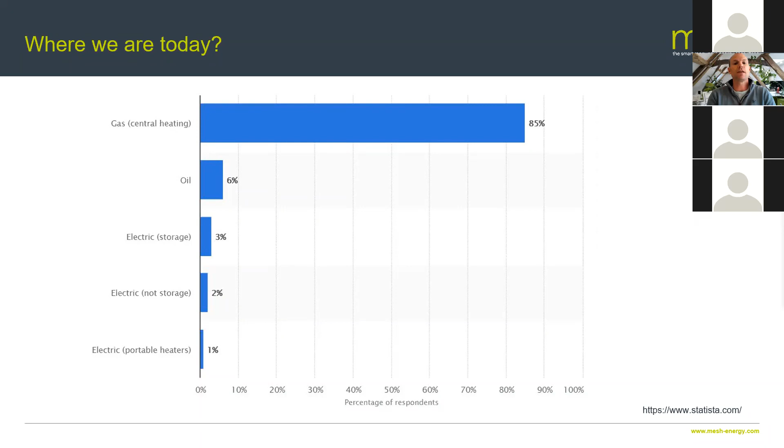So I thought I would just share these numbers if it was at all unclear the magnitude of what has to happen to get off gas. This is when you look at the proportion of houses that use different fuels. Again, gas central heating, 85% there. These other things, electric portable heaters, electric storage heaters, and even oil. Oil, that was a surprise for me, how low that was. But gas by a country mile is the big predominant fuel source. So if we can get off gas to something more sustainable, then that's going to solve a really big problem for us. But the numbers are quite significant.

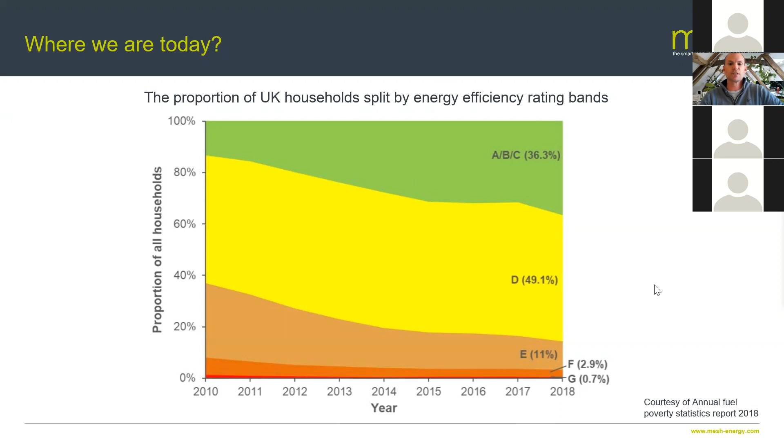And I thought I'd also show you this graphic, for those of you who are familiar with what an EPC is. This is how EPC ratings have been changing over the last 8 years. In the green band at the top, it's EPC ratings from A to C, D in yellow, E in light orange, and F and G in the darker oranges. So as you can see, over the last 8 years, UK households have been improving. They have been getting more efficient. There's still a lot of work to do to get the vast majority in the ABC territory, but the trend is getting there, and I'm sure that will accelerate over the coming decade. It has to, but there is no doubt that there's a big challenge with insulating existing buildings.

So the decade ahead: the government has committed to net zero carbon by 2050. And more recently, only in the news a few weeks ago, they committed to a 78% emissions reduction by 2035. This goes to show that the work being done over the next 15 years really needs to move the needle. If you were to project that for another 15 years to 2050, we'd be well below net zero. But anybody familiar with the Pareto principle, the 80-20 rule, knows there's low-hanging fruit. There's easier stuff to do sooner, and bigger gains in the short term. Then the really hard slog comes in those latter years, as it gets progressively more difficult to get to your goal.

The other big thing which is changing is that all of a sudden, big Goliaths of the commercial world have started announcing their commitments. This has come from a lot of social pressure, but also governmental pressure. So you've got Amazon and Google who've said they're going to be net zero carbon by 2040. And then Microsoft, Apple, and Facebook, who said they're going to have net zero carbon emissions by as soon as 2030. All of these companies use a vast amount of energy, but Amazon and Google particularly, given the size of their businesses and the processes they run to deliver value to their clients, reckon it's going to take them another 10 years. You will have seen adverts on TV from some of these companies. They're pretty serious about it.

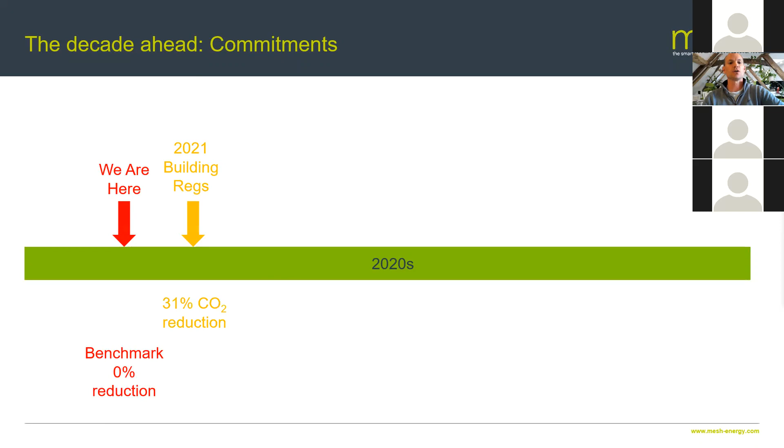So these are the new building regulations, and a 31% CO2 or carbon emissions reduction target is being set through a balance of fabric and emissions. The Future Homes Standard, if you haven't heard of this, the government has done a big consultation on it, really putting a much firmer flag in the ground in the middle of the decade. What we're talking about here is a 70% carbon emissions reduction in the built environment for new buildings by the middle of the decade. And who knows what will happen at the end of the decade.

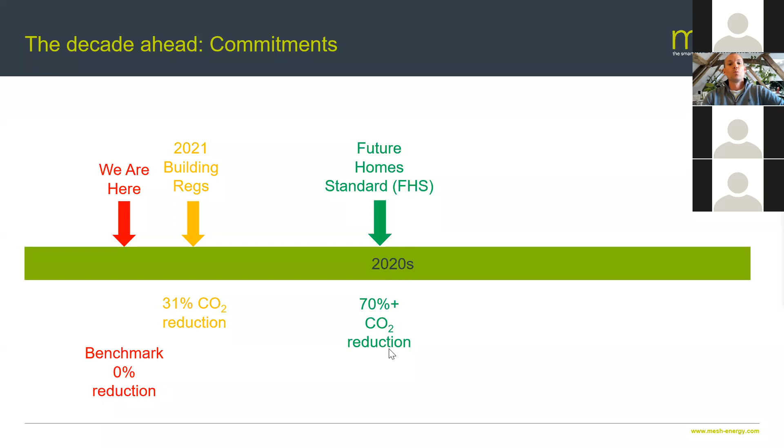So to answer your question in the chat here, what they're saying at the moment is with the new regs coming in, you can still put a gas boiler in and make that work and get that 31% reduction. But when it comes to the middle of the decade, so 2025 at the moment, based on the SAP calculations that are done, gas boilers will no longer be compliant. So we've got 3.5 years to get our heads around putting something other than gas boilers in new build properties.

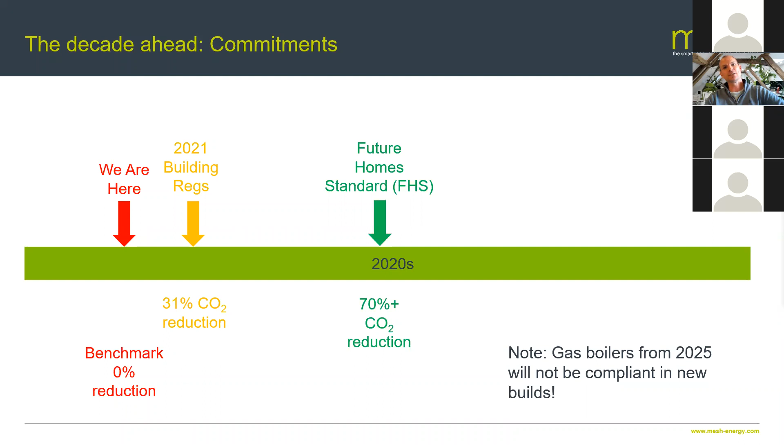So there's your answer. If you guessed 2025, Yulia, well done. Daryl hedged his bets, he said 2025, 26. Anna, we've got loads of people guessing 2025, 26. Glenn, well done. So a really good set of guesses there, but the middle of the decade is when gas boilers will no longer be allowed.

And of course, social media, TV adverts, all kinds of media help do that. But there's a lot of consumer understanding and change that needs to happen as well. But ultimately, they're guided by you guys as design professionals. The actual professional design standards need to change, and there needs to be further training and education around those. And also the rate of change of learning needs to change.

We'll all be aware of the network effect. Imagine you had a line of people whispering to one another what was happening. It would take you a long, long time to get to the end of the chain, and by the end of the chain, the story is likely to have changed. Good old Chinese whispers. But if we can centralize what we're learning and share in a networked effect, the knowledge transfer happens far more quickly, and you find out the key details sooner as well.

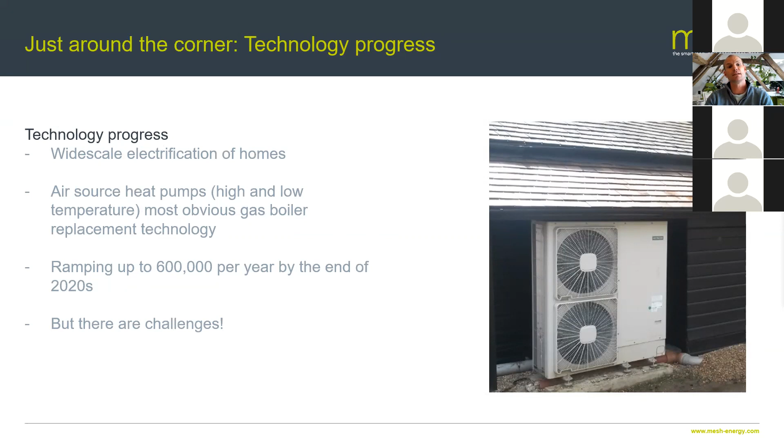But we can't talk about other technologies without talking about hydrogen boilers. Again, hydrogen boilers are being written about more and more. I've answered numerous questions about hydrogen boilers in past webinars that we've done. There is a tendency for some people to think that hydrogen, because oxygen and water are used to produce hydrogen, and once you've burnt it you end up with some lovely, nice stuff at the end as a byproduct, that hydrogen is the solution to all of our problems.

There's two issues with that, and there are various studies. We're not going to go in depth here, but the general headlines are that in hydrogen's favor, using the existing gas pipework distribution network is a big tick. We can use that pipework, we can start introducing hydrogen into the gas mix and almost cutting the two together. And it's not a big leap to get from a gas boiler to a hybrid gas and hydrogen boiler. And there will be some manufacturers that will be doing that to plug the gap.

What numerous studies have suggested, though, is whilst hydrogen seems great on the face of it, and we can use that existing infrastructure, there are issues with storing hydrogen. When you look at the overall cost of providing hydrogen to homes, it's actually relatively carbon intensive, and the energy involved in storing it is massive. The other slight issue is that far smarter people than me reckon that the penetration of hydrogen into the overall heating mix will only be about 15%. We're not expecting a big seismic change over to hydrogen boilers.

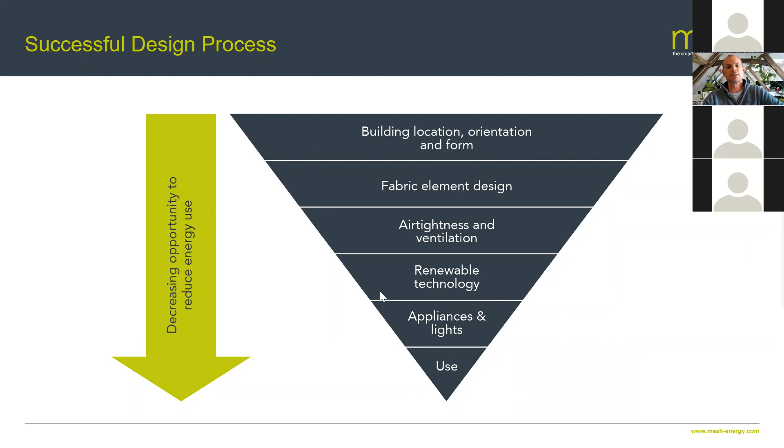As we've said before, the best way to spend money and the best way to save energy is working from the top down here. There's no magic here. This is just logic and being better informed as part of the design process. And so if you can get your head around the common sense involved in these stages of decent design, the next thing is to get your head around how you design.

And this is going from linear design and thinking in a very linear way. The client tells you what to do. You then absorb that. You then tell the structural engineer what needs to happen. The structural engineer then figures out the building can just about stand up or stand up effortlessly. And then you do the MEP and all these other kinds of things. And then the builder does his bit. That is very linear building design. And rapidly, we are getting our head around the fact that that can no longer continue.

And it has to be a very hub and spoke approach. You need to have a solid understanding at the center of your project from a very, very early stage. That could be a great team, a collaborative team, the right tools, or a mixture of all of the above to make sure that you can cover off the design in all of its stages and, as I say, de-risk it. So going from that linear approach to that hub and spoke approach, for some people will be a steeper mountain to climb to effect that change.

Some are already on board with this and get it, and they're working with their clients and the rest of their team to understand costs and the right kind of blend of advice that they get as the project continues. And this is the main thing here, really: with better design comes better goal setting, better sustainable goal setting, and then being able to intelligently push those doors rather than a shotgun approach here, more intelligently pushing doors and using analysis to help you out there.

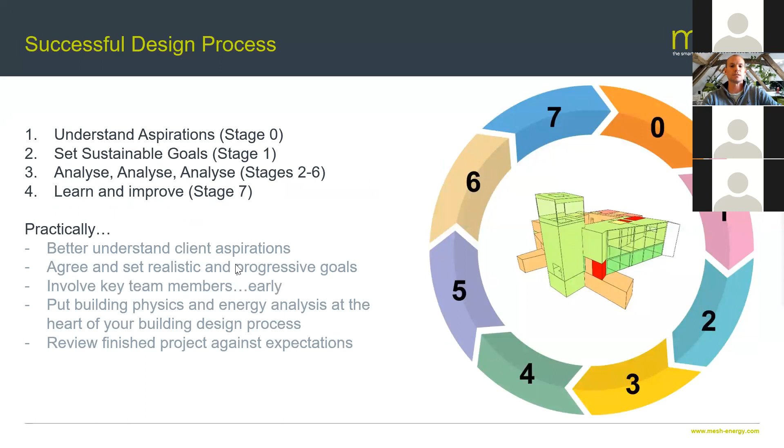I'm not going to focus on this really. This was just some key things to do during these stages. So zooming in even further, let's talk about some practical details. We've started with education. We've talked about the design process. I hate woolly webinars, and that's why I always like putting some numbers in here. These are some numbers which will hopefully guide you in showing you what your buildings are going to have to look like for new builds to be able to get off gas sensibly.

This is a Frankenstein of a table that we did before, but we've got at the moment the current building regulations looking at the various U values, what your heating and hot water system might be, what your ventilation system might be, and any energy generation. So your current regs, pretty standard stuff, nominal U values, gas boiler, mechanical ventilation. For the targets that are coming up, these numbers have actually come out of the consultation document that the government came back with, so do pay attention to these. These aren't just ones that we've made up.

The 2021 building regulations targets have tightened roof U values and window U values. Air tightness hasn't changed. Still got a gas boiler in there, still got mechanical ventilation, but they are suggesting solar PV and tightening U values to get to that 31% reduction. If you can't put solar PV on there, you're going to have to tighten the U values as well for the buildings. This gives you a flavor of the U values and the type of technologies going in to meet the 2021 regs.

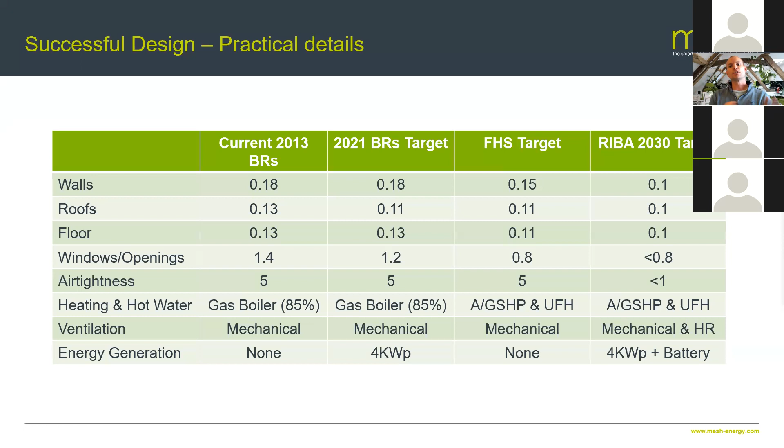But this does go to show how compliance changes, the future home standard, which will be announced in the next couple of years, and the RIBA 2030 targets, which are very much voluntary, how they align, and you can see the story that's being told here.

And other areas of the project you need to be aware of. Moving away from fossil fuels and making sustainable buildings, just looking at running costs, more effective and cheaper to run is all around building fabric, air tightness, and the way that you get that energy into the building.

You know, you've heard us say this before, if you can lower what we call the flow temperature through the heating system, the air source heat pump or hydrogen boiler or gas boiler or whatever doesn't need to work so hard. And if you've got underfloor heating compared to smaller radiators on the walls, that means that you can keep the occupants nice and warm in the middle of winter at a very, very low temperature. And the lower these flow temperatures, the more efficient the system.

But here are the top 5 things that we need to bear in mind as we start thinking about coming off gas. One is plant space, particularly for, let's talk about air source heat pumps. You need space in the outdoor garden or up against the house for the external wall unit. There's no such thing at the moment as a combi air source heat pump system. So you're going to have to look at hot water cylinders, even for smaller properties, and for larger ones, a larger hot water cylinder. As I say, the emitter design temperatures, so a nice low flow temperature underfloor heating system or nice low flow temperature radiators.